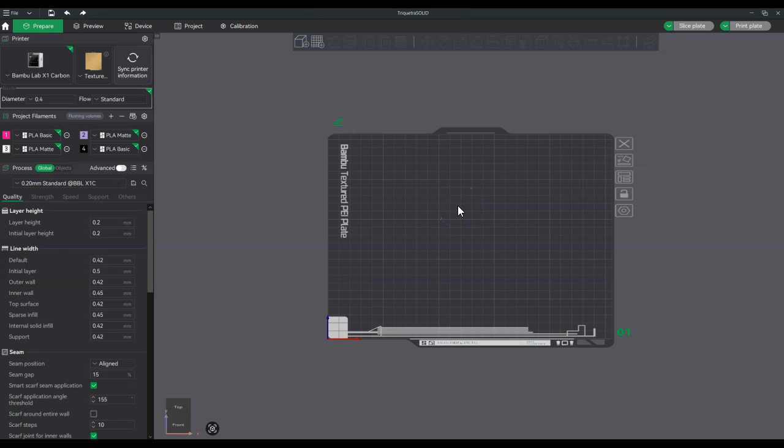This is a quick and easy tutorial how to add custom magnet holes in your model. I'm using Bambu Studio for this tutorial. First, load your STL file. You can do that here. Let me magically paint it real quick.

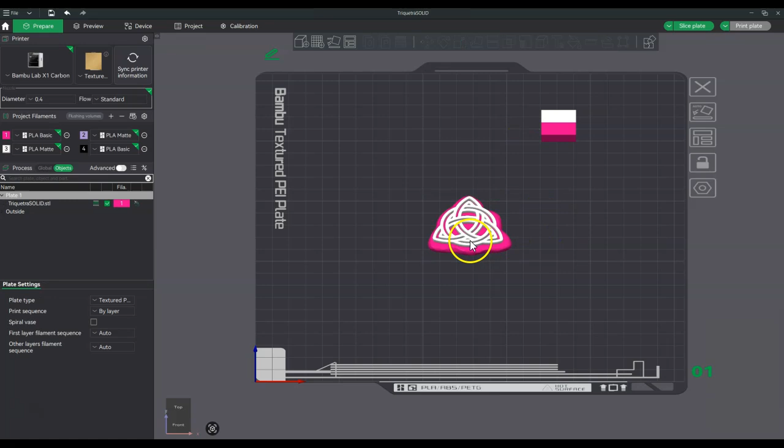Scale your model to the size you want it to be. I go for 5 centimeter, so 50 millimeters. Now we want to center it. Usually it is already centered, but in the case it is not, select your model and right click. From the drop down menu, choose center. If it's grayed out like this, it's already centered.

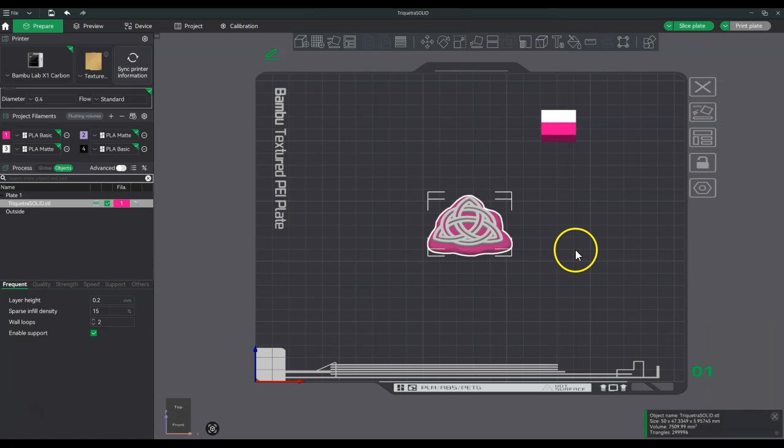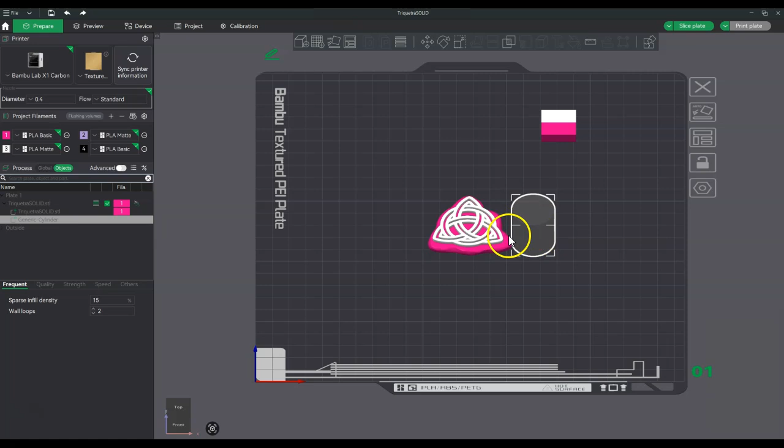Then you right click once more on the model and choose add negative part, and I go for cylinder as I have a round magnet. And in this pop-up you can click OK. Now with the cylinder selected, go to the scale tool, or you can press S.

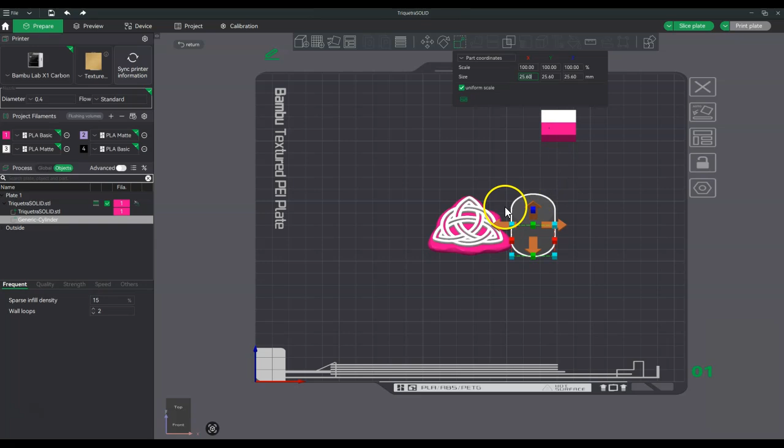And in this dialog we want to input the size of your magnet with a little bit of tolerance. My magnet is 10 millimeters and I like my tolerance on the larger side, so the glue has space to reach the sides of the recess a bit when the magnet is pressed down in the hole. And that is my personal preference, of course. You can pick a tolerance that works for you.

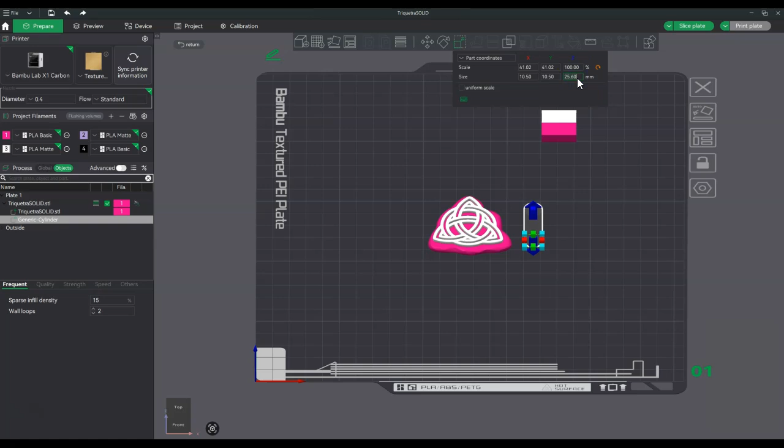The first thing I do is uncheck the uniform scale option. And then I make the X and Y 10.5, so I have half a millimeter tolerance. My magnet has a 2 millimeter thickness, so in the Z input field, I insert 2.5 millimeters. And then I deactivate the scale tool.

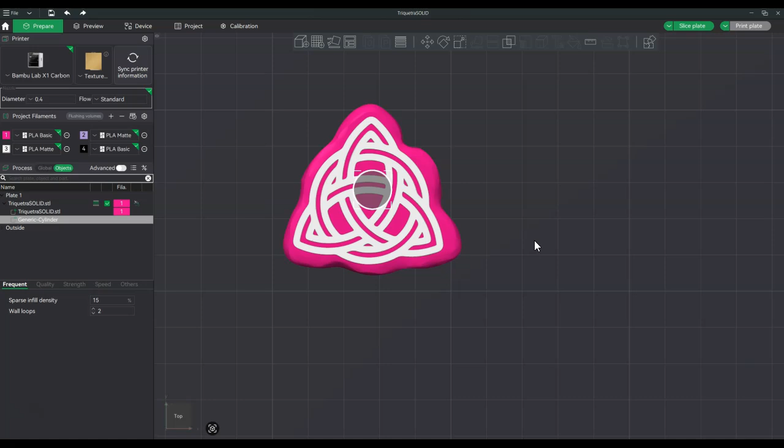And then right click on the cylinder and center. Like that. Just switching to the top view with Control 1. Now the magnet has to be positioned in the side view. So press Control 5 and zoom in a bit.

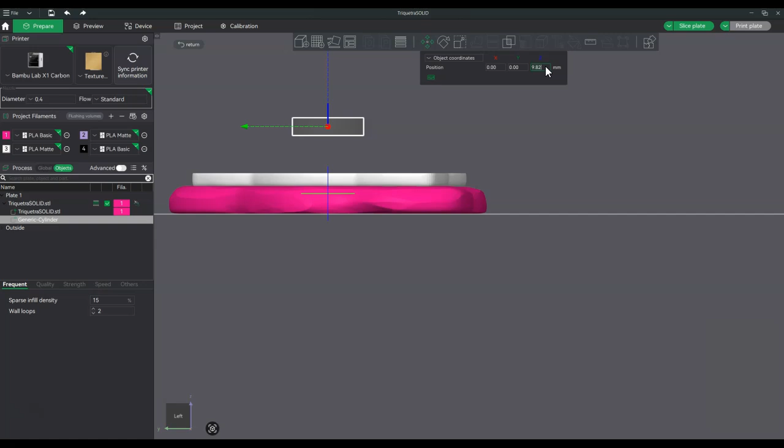With the magnet selected, press M for the Move tool, or you can access Move at the top menu, this one. In the Z input field, insert -2. Slice your plate and see the hole at the bottom, just like we want it. And even without supports.

Now, if you would like to enable supports, you can, of course, and make sure to check all checkboxes in the Support tab. I like to up both of the values of the Z distance to at least 0.3 millimeters. But let's be a rebel and put them to 0.5, so to make the gap surrounding the support more obvious.

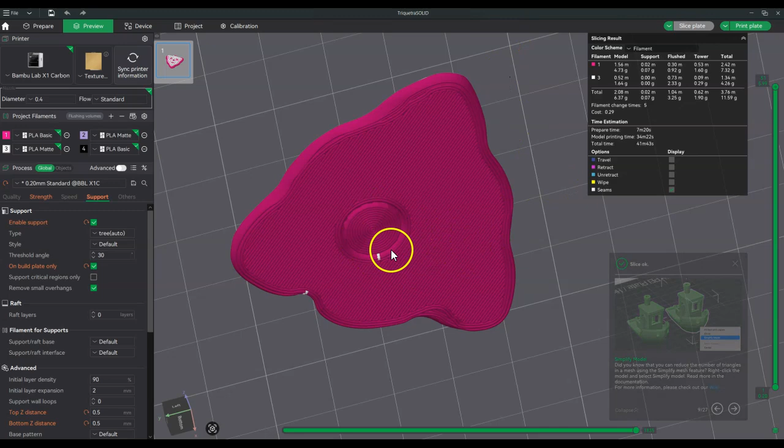And if you uncheck support critical regions only and slice again, you can see the hole is filled up with support. And it has a gap, so the support can be easily separated from the model.

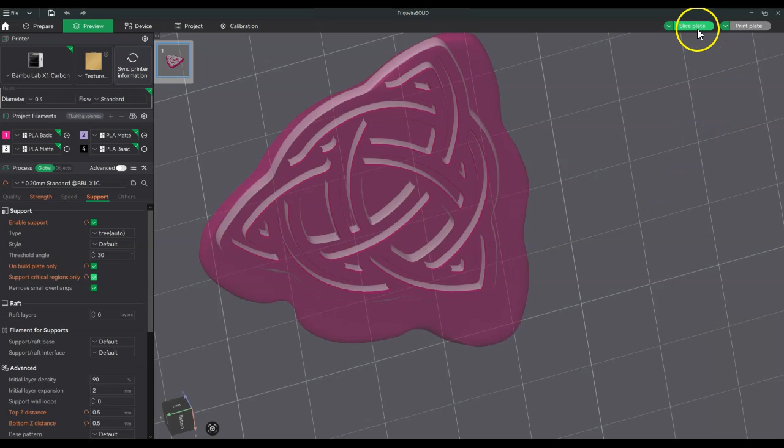From my experience, my printer has no difficulties bridging the bottom of the hole. So I do check support critical regions only and let the slicer decide what it needs. I hope that made sense and that you found it helpful.